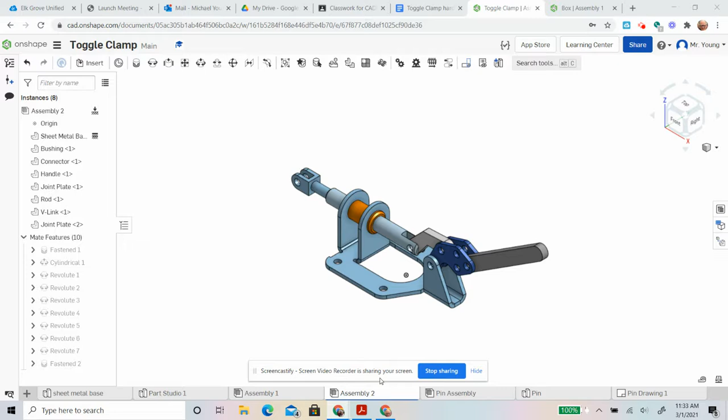All right, here we go with a few hints on the hardware, the pin, etc. Your pin should look like this.

And then you're going to create another assembly, and you're going to put these rings in and mate them. We're just using fasten.

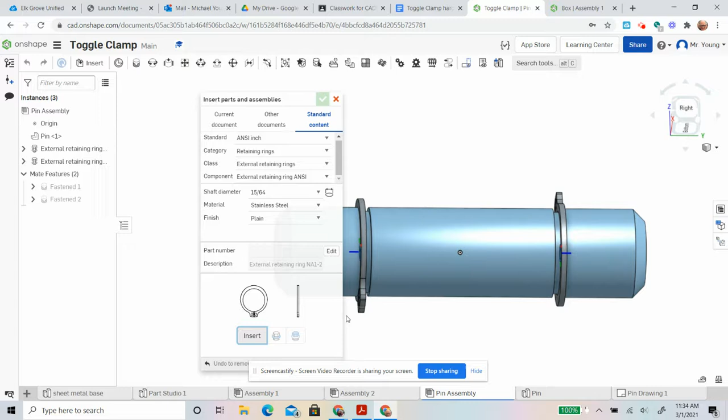So to insert, you go to standard content, retaining rings, external rings, and you only have one choice here. And then we're using just a little bit smaller than a quarter inch, 15/64. You go insert, bring it in there, etc. Put two of them in.

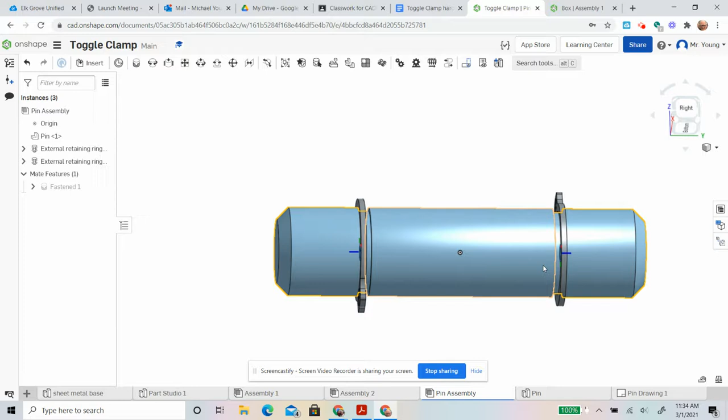Okay, I already have mine in there. So let me just delete this one.

We want to line the surface up with this outside edge, not the inside edge, but the outside edge, so that we have some space here. This between this shoulder and this shoulder is exactly half an inch, and that's how wide our piece is this goes through.

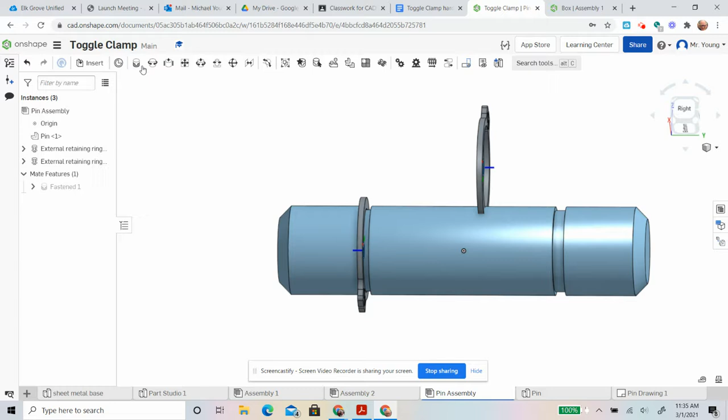So we have to have a wiggle room, a little space outside for this to go in. So we just can use a fasten mate, and we're going to do this outside surface to this outside edge.

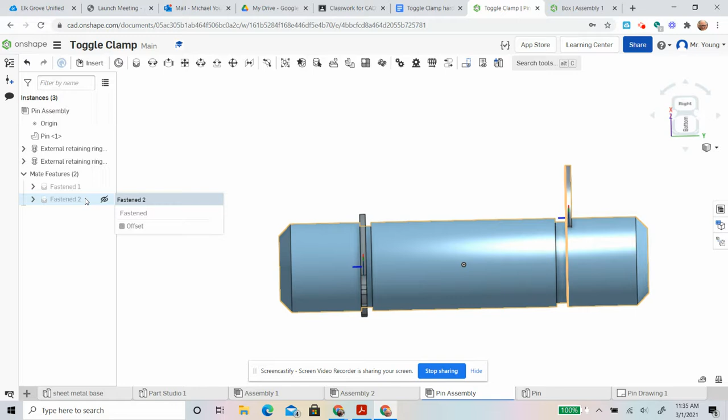And it worked. Now, when I've done it in the past, sometimes it's wrong, it's lined up but flipped. Sometimes it looks like this. So if you check mark it, it's going to be no good, so that's not what we want. I don't know why it's not lined up to the center, but that's curious.

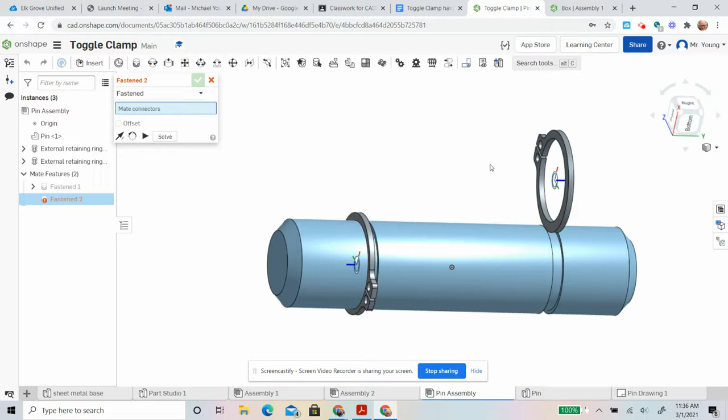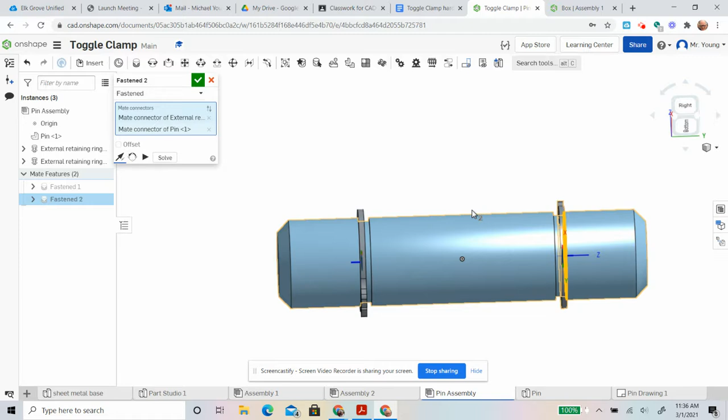You can see it's on the wrong side, it's flipped wrong here, so we go like that and it gets it back in there. So anyway, that's that. Once you have that assembly, then...

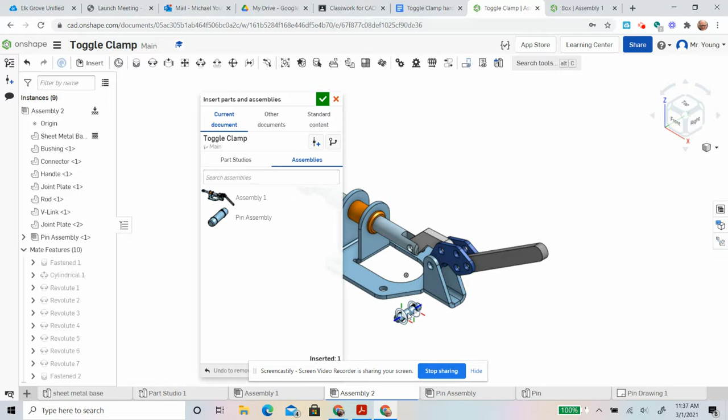We want to get all that in here. So now we can go insert, and we can insert assemblies. And I'll bring all three parts in at once with their mates and everything.

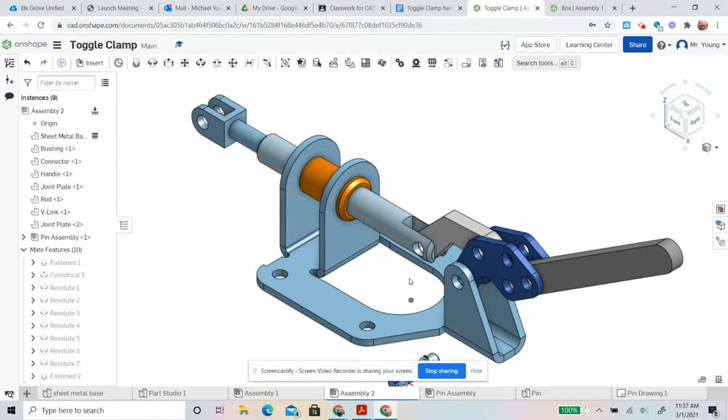Okay, so I'm going to slide this into the hole. If I had a flat surface on, actually I might be able to fasten it. I hate all these. This end, you can't fasten it to this because it's circular. But you might be able to do it to the inside of this, and then we have to offset it.

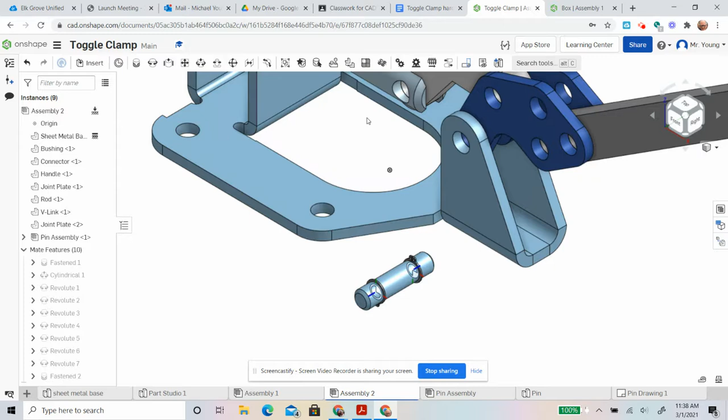So let's try that. Now this is in the way, so I'm going to right click on it and hide it. Okay, so now I'm going to fasten this...

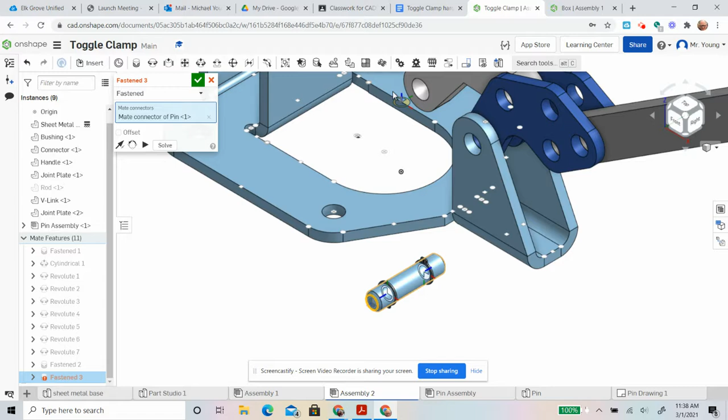To this hole. Can I choose that hole? There, right there. And then I want to move it out.

I think it's... I have to go out past the ring. So it's 3/8 of an inch, I believe. We'll try it. 0.375. That looks good.

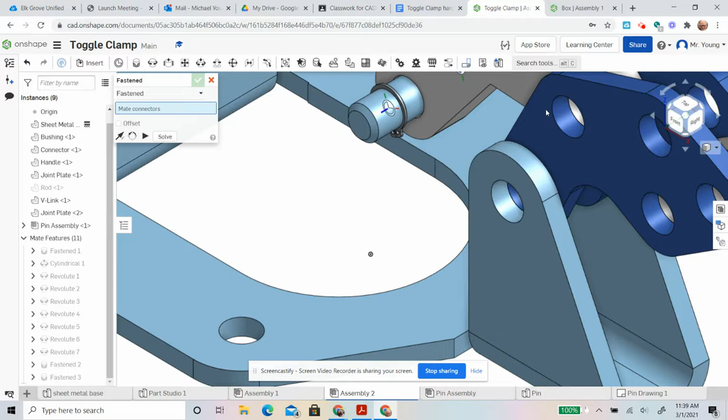And then I will turn this one back on. Let's see. Whoops. Right there. Okay, looks good. That was easier than how I did it earlier. It's always more than one way to skin a cat.

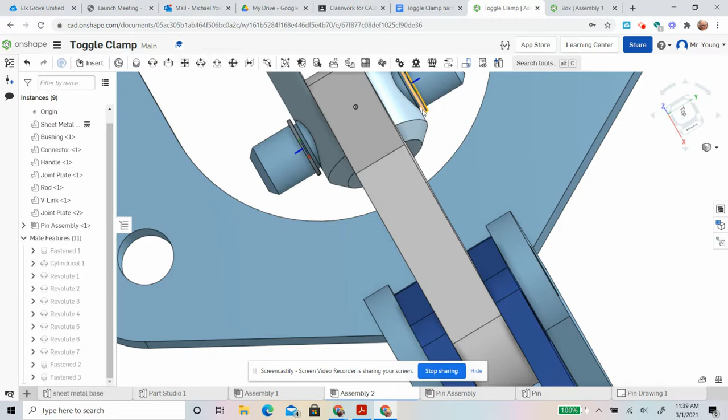So now, notice that I have a little gap here, and a little gap here. In real life you need little bits of space, like a 32nd of an inch, and there's hardly any at all, but it makes your life so much easier.

Sometimes it's just possible. Okay, so the only thing we need is nuts and bolts. I'll bring one nut in and one bolt, machine screw. Okay, so we go insert...

Standard content. Now we want screws, we want machine screws. That was the last thing I chose, so that was the default, and it was panhead. You have all kinds of choices here. We want a little less than a quarter inch, which is this one.

28 -- we have two choices, 28 threads per inch or 24 threads per inch. We're choosing 28. You could choose 24, but then everything has to be 24. And this first one is an inch long; all the others are 3/4. So we'll just bring the 3/4 one in now.

Oops, I should hit the green check mark. That was silly. Everything stayed the same, right? Yep. You actually need 3 of them.

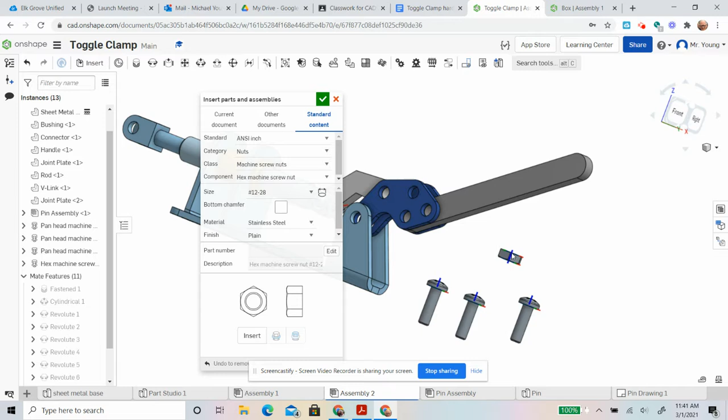Copy it. Control V, Control V, Control V. So that's easier, especially if you need 10 or 12 or 100, rather than dragging them in one at a time.

Okay, then you have to go out and get a 1-inch bolt too. All right, so this is really not...

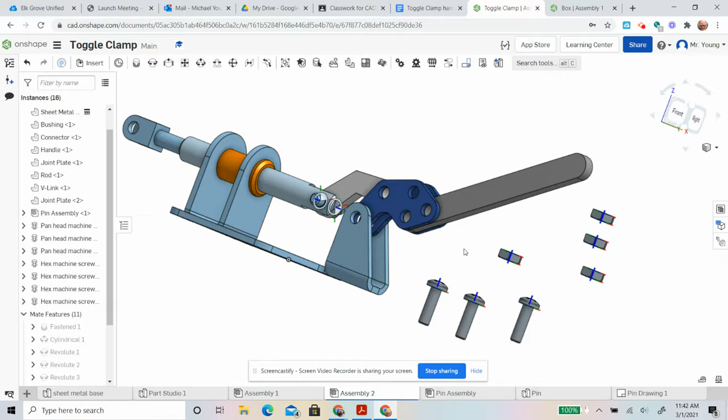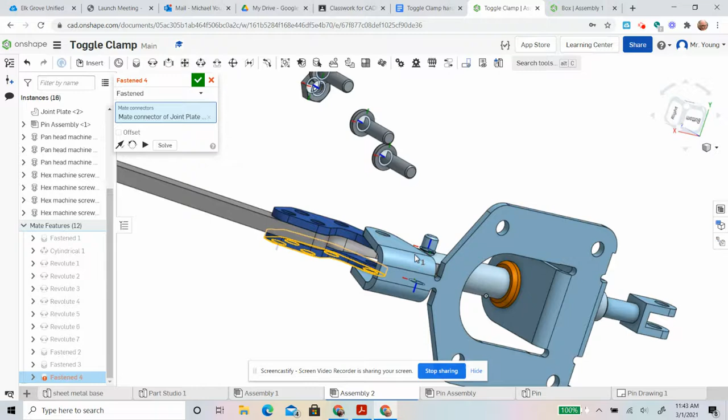I think we can use, if I remember, I just use a fasten. I'm going to fasten into this outer edge to... did it, but it's backwards. So let's see if this turns it around.

Yep, there it is. And then we need to put a nut on that.

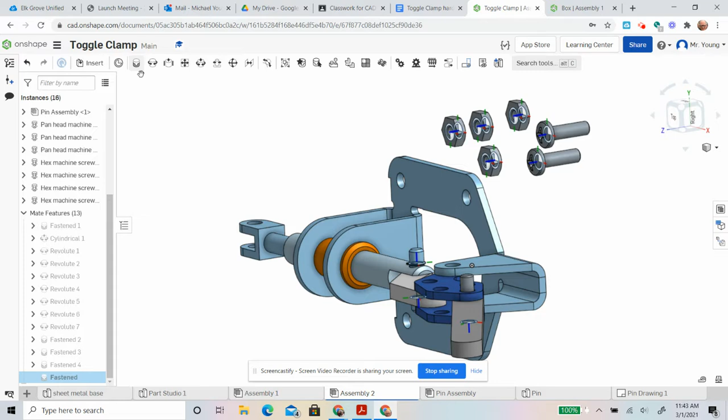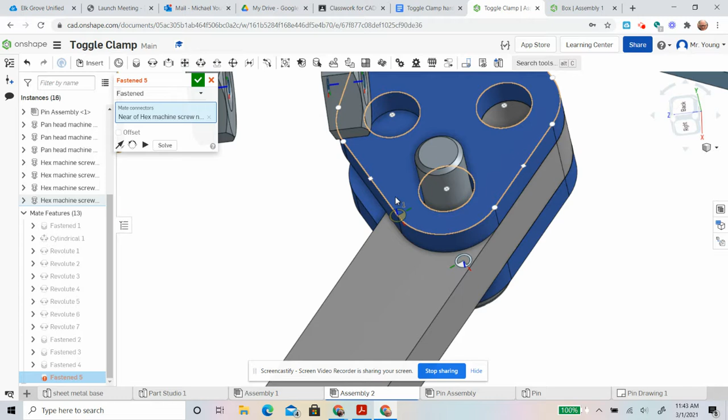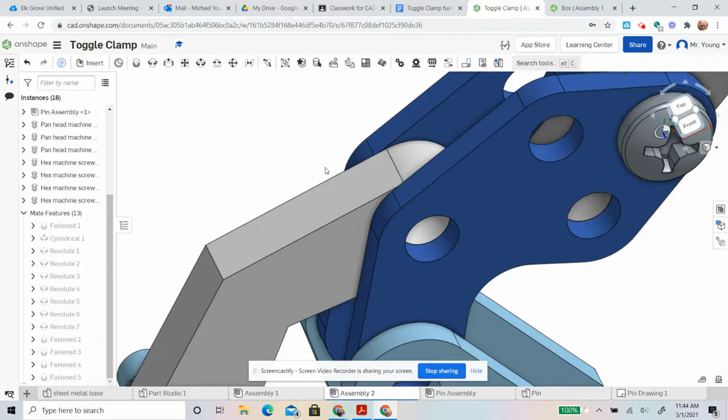Right. Oh, and that's backwards too, huh? There we go. And there you go, you got to do that 3 more times.

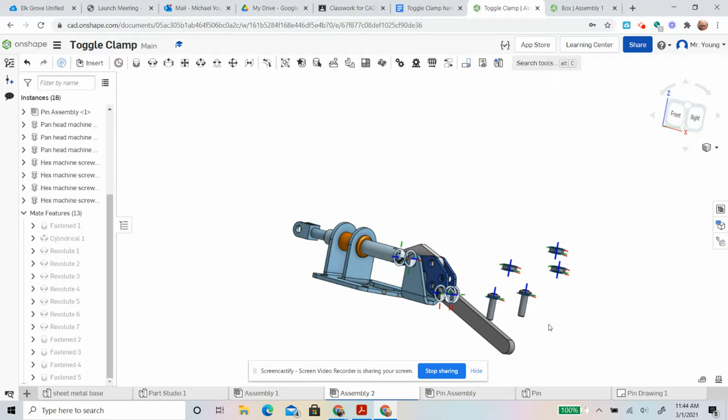When you're all finished, you have to limit one of these joints. I don't want to be able to go all the way around. That's not how it works in real life. You come down to about here somewhere. I mean, you actually can't go any farther than this, can't run into this piece here, can it? And this way...

Just first of all, get rid of all these mate connectors. It goes this way, it's almost up to this lip here when it... so again, we can't go. So this is about right there.

It starts to go. So somewhere in here it should stop. I mean, anywhere between here and here. And then it can't go past right about there.

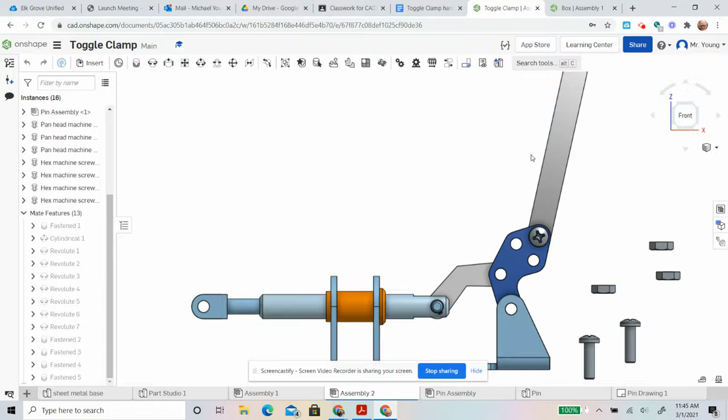One of my students suggested earlier today to limit that joint, so that's maybe where I'd start. Okay, so that's what you have to do for tonight.